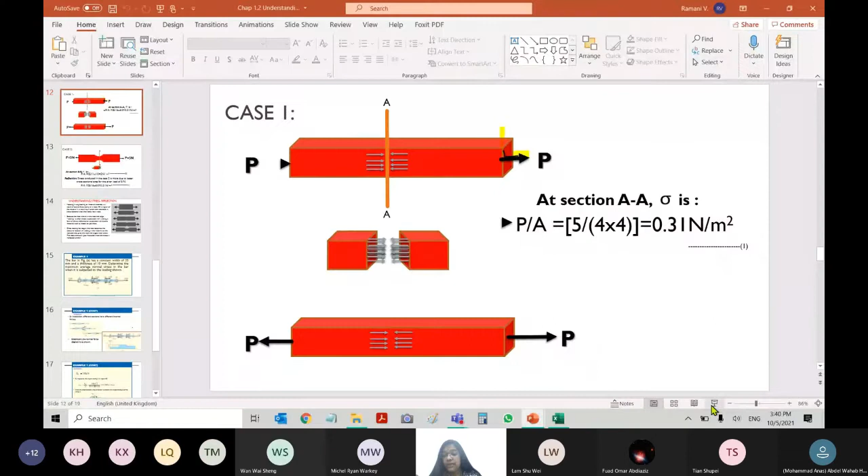You have to have good imagination power, otherwise you cannot solve. Now see, original area was 4 by 4. With 4 by 4, you got 0.31. On the other hand, is my voice low? Very low, why is this very low? Okay now it's clear. Originally the area of cross section was 4 by 4, got 0.31.

Because you have so much, I can compare here. This is the cross section, right? So much area, the applied load and the resultant stress can get distributed over a big area of cross section. On the other hand, when the cross section is changing, reduced to 1 by 1, the same stress has to be distributed within this smaller area, hence it will be very intense. That's why you are getting a value of 5 Newton over meter square.

You can also explain another way: stress is inversely proportional to area. Sigma equals P over A, A is at the denominator. Hence when the area is decreasing, stress will be more. When the area is increasing, stress will be less. The same principle is applied in many applications like hydraulic press, operating cranes, hydraulic jack - many different operations and applications are based on this principle.

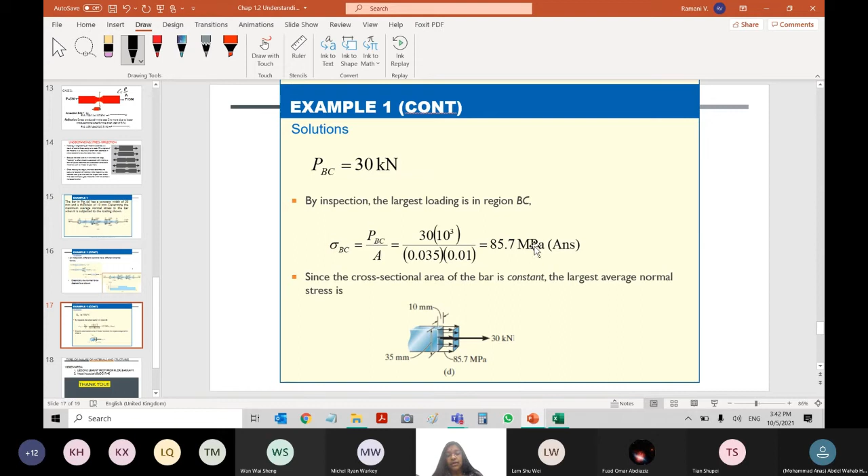Okay, and then we learned this and also solved this question. Any doubt in this question? Do you understand how we solved this one? We took it part by part, A-B, B-C, C-D. We found out the distribution of how the stress values are distributed one by one, and then we calculated which is the maximum. Hence the maximum stress will be given by this loading - stress equals load divided by area of cross section at that point, providing you the maximum stress borne by this material.

Actually, I have a question here. For the 4 kilonewton, where did we calculate it, or did we just ignore it? You see the C? Yeah, it's 4 kilonewton. So where did we calculate that, like when you did the cross section, I can't get it - where it goes.

Okay, is this clear up to this point? Wait, I take my tutorial, I explained clearly there - tutorial week 1, I think it's all in there. I did it part by part, I also posted this tutorial for you. You understood up to this point, right? How we calculated 30, got 30 in this direction - remember the point in this direction. Next point, I put all the blue color as the stress produced or generated by the material due to its property.

And the red color ones are the loads given, external loads given to you in the question. I posted this one in your tutorial section. The red color ones are showing the loads acting, and the blue are the stress produced by the body.

In the beginning you understood action, reaction. When you sum up, your reaction should be 30.

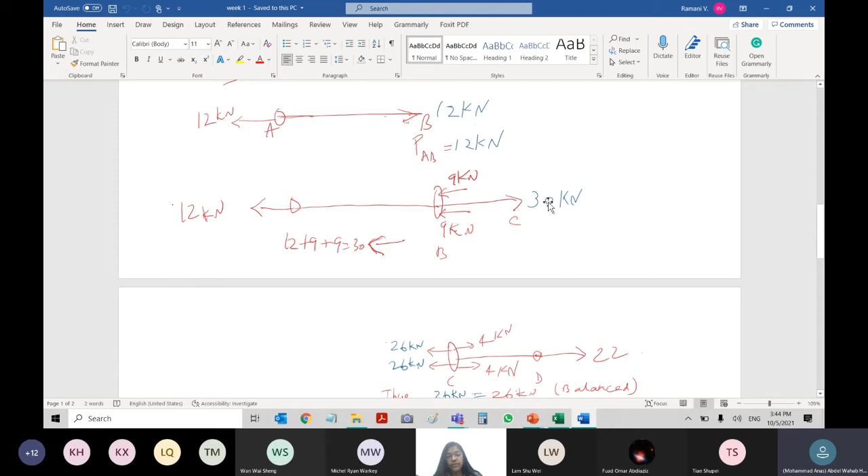When you go to BC, CD, at this point, suddenly due to the other direction 4, it must get reduced to 26, no longer 30. The point after C, or right of C, because of this direction 4, the 30 gets reduced. 30 minus 4 changes to 26, because opposite direction I deduct.

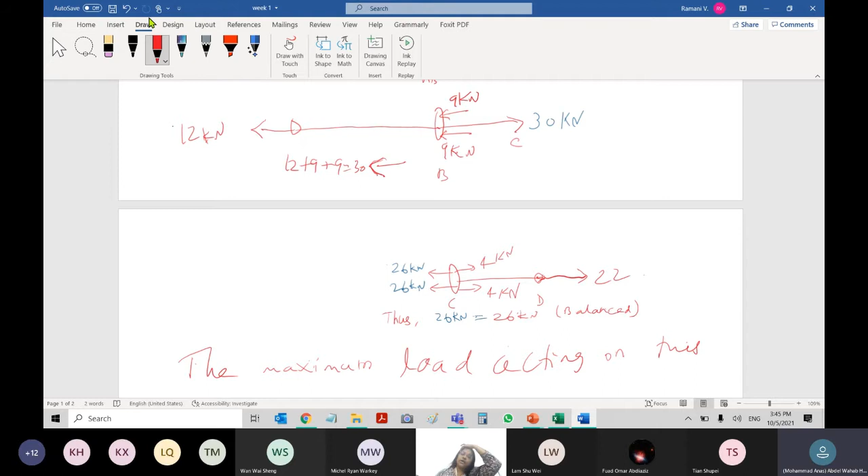It's a straight line, later I change it. But I think I posted, let me check. If not, I will post it by today. Oh, I didn't do it. I will do it together on the class for today.

Hope you are clear, and the corresponding drawing also, you please follow accordingly, follow the logic, understand. Here you must have cognitive 1, 2, 3 until 4. Your cognitive is 4 analysis, but you have to have all the cognitives from 1 to 3 or 4, then only you can solve.

You have to have knowledge or understanding, remember or able to comprehend, and then apply the equations, equilibrium equation, or whatever material property compatibility equation to solve. Finally, analyze. Analyze means, yeah, I saw the homeworks.

You please do, analyze means nobody will ask you to do plot, sketch, mark, all these things. Nobody will ask. Analyze. Whenever the question comes out, analyze, please do all the sketches. Otherwise it is like copy paste, that too, it is even worse.

You are online, I don't know how much you learn, what you learn. Please do all the drawings, all the sketches in the calculation, whatever related to it. Although you are a genius one, you don't need any solving equation, you can get the answer, you need the drawing. Otherwise you lose marks because I have to provide marks for each and every step.

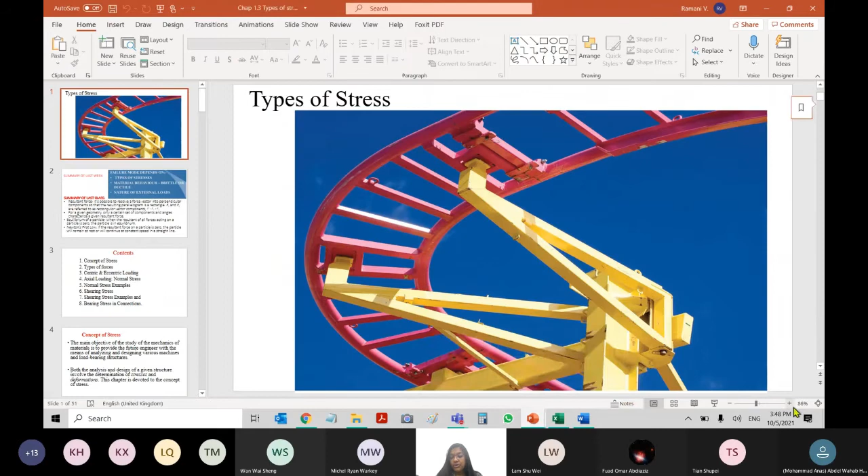Next one here, today we're going to solve for types of stresses. Last class we understood what is stress and what are the governing equations. Simple equation, I repeat: stress is denoted by sigma, equal to force over area, load over area, P over area, area of cross section.

Area of cross section, later we'll see about surface. For now, remember this point only. We move one by one, and if it is tensile force by area, then it is called tensile stress.

If it is shear, accordingly, and then what else? Compressive. Today you are going to learn all about these different types of stresses produced by different types of forces.

Come on, you see here this type of wheel in a theme park. You can see these types of wheels. You may be given this beam to analyze. This beam is supported here and then it is rotating. This end is rotating, it is anchored here, but it is rotating with so many connections. See here, there's a plate, a bracket, and there may be some nuts and bolts to join with this, and it is in rotation.

How? By properly designing its screws, and then the size of the bracket, the beam, the size of the beam, size of the angle, the support condition—all these things matter. Above all, the material.

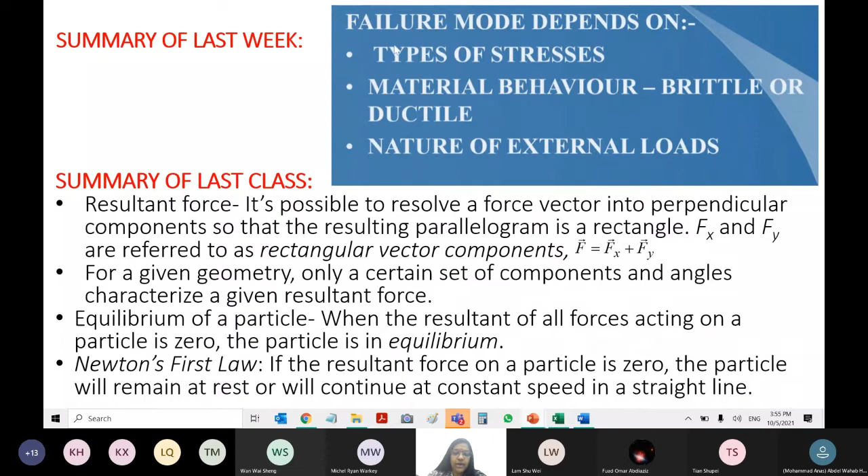This we all discussed last class. Newton's first law says the resultant force on a particle is zero, the particle will remain at rest or continue at constant speed in a straight line. There shouldn't be any difference in energy, force, mass, or stress in a member. Even if there is a difference, it should be balanced by the next loading or next component or member. Overall, the system is kept at equilibrium condition.

Concept of stress. Today's class we'll go through the types of stress, concept of stress once again, and then type of stress. It's very interesting - if you understand this, it's such an easy paper, easier than the mathematics paper for your information. But you have to imagine and understand. Spend some time every day, half an hour, at least 1 hour in a week is enough.

Concept of stress, type of forces, centric and eccentric. Here in this module I do only centric, eccentric. I teach you the theory, but eccentric is not needed. Let's understand only centric loading. Eccentric loading, you can do at a higher level, not at this point.

Let's start off peripherally. You have to go horizontally. Must know all types of stresses, all types of analysis, and then we can go deeper.

Axial load, normal stress. Axial load has different types, I will explain one by one. Today we will go through normal stress. Hopefully I finish normal stress, two types. The next class we do the shearing stress. If I can finish shear stress, I will go for this.

So there are two types: normal stress and shear stress. Shearing stress examples: bearing stress. The stress produced at the bearing, exclusively at the bearings, is to be analyzed separately as a typical structure. That's why it is also called bearing stress. We'll see how it is being analyzed.

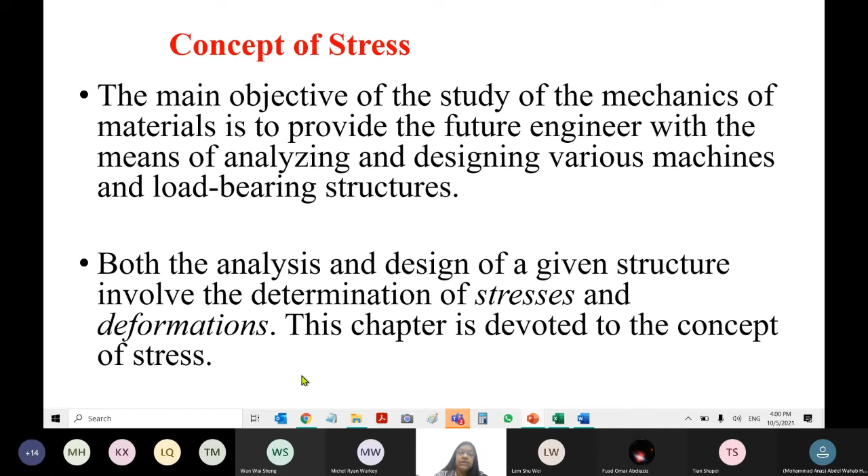This chapter is devoted to the concept of stress. Now we'll look into the concept of stress. To understand the concept, you should know the types.

Start with the type of load. We call this the type of loads or forces acting on the structure. This makes a difference in the member, causing a different stress distribution in the member. That's why you should know what are the types of loads coming in.

If I miss anything, please guide me. Maybe you've come across a new type of loading in your previous studies, other subjects, a magazine, or a newspaper. I wanted to discuss this matter, but there's a new type I forgot. Suddenly I'm not getting it. Let me finish this first.

I will get it - forces induced by gravity. Number one is gravity, meaning self-weight of the body. Without gravity acting on it, the body would be weightless, floating or flying off. Any body has some weight because it is acted upon by gravity, and because of gravity it has some force.

It may be dead load or live load, though actually live load should be separate. I don't know why it's grouped like this, but live loads are also acted upon by gravity, that's why they're put under this category. So we have dead loads and live loads - permanent and transient, self weight and moving weight.

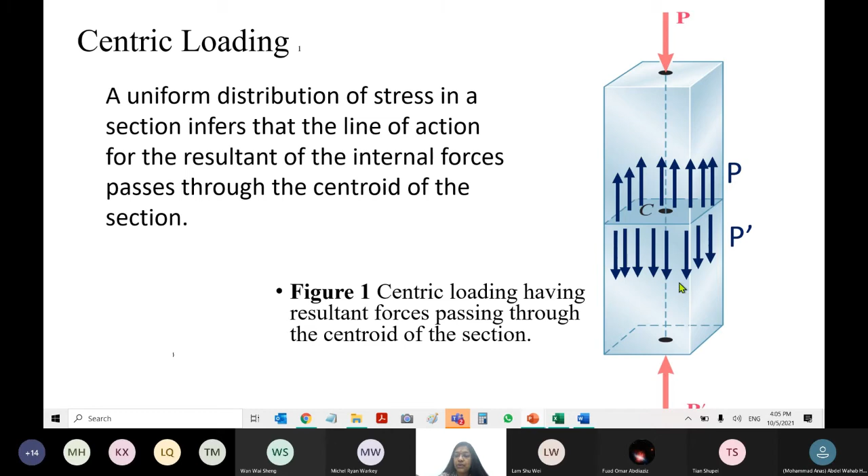There's some text. Okay, leave it, you can see the P dash. It has P dash.

When P is acting, there will be a reaction due to the material of the body, the body respond to this load by amount of P, and this load is in this direction, P dash. That's why the body respond. Any section, like you can take section here or here, it will be subjected to a uniform load in opposite direction, equal and opposite. This P dash is distributed all through the cross section, and the summation or the resultant of all these things will be equal to P dash. That's the beauty, you have to understand that way.

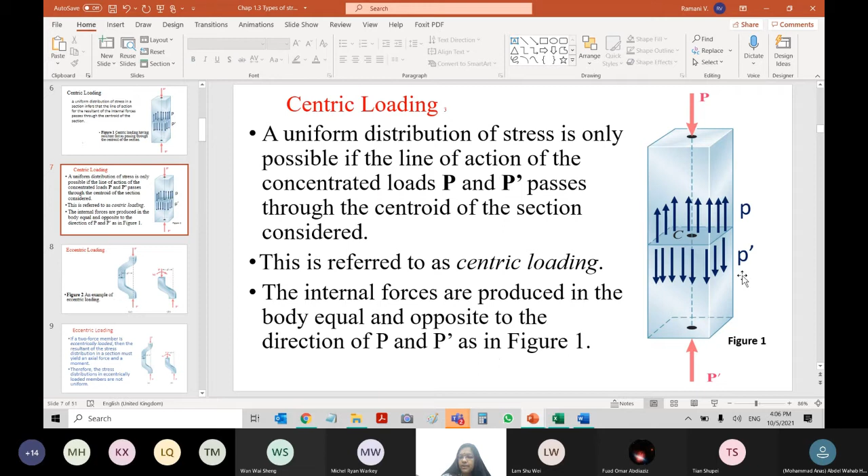The point load is applied at the center or axis of the member. Along this axis of the member, it is reacted or responded by the material or body in the opposite direction, and is uniformly distributed across the area. That is what you have to understand. This is referring to centric loading, because the load is at the center. The internal forces produced in the body are equal and opposite to the direction of P and P dash. So it should be opposite, according to Newton's law of motion.

Then, eccentric. What is eccentric loading? An example of eccentric loading: you see here, the load is here, the center of the material is here. The material continues from here until it passes through and ends here. There's a bend only. The material passes like this, and the center of the body, or centroid of this whole body calculated, is lying at this point, but the load is acted at a distance d from the centroid.

Then it is called eccentric loading. Same goes here. And if a two force member is eccentrically loaded, then the resultant of the stress distribution in a section must yield an axial force and a moment. So whenever there is an axial load, whenever a member is subjected to loading, it may be axial load or sideway or vertical in any direction, it must show two things: reaction to this force, and also a moment.

So far you are learning like this, but technically we cannot prove it. So far we understand that the load applied to a member is distributed in two directions: one in this direction, another one across. When it talks about the direction in the vertical direction, it is a force, shear force. When it is in the horizontal direction, it is of a different type. It may be a summation of bending, tensile and compression. That's why I end up with a moment. We call the horizontal reaction or response of the body as a moment.

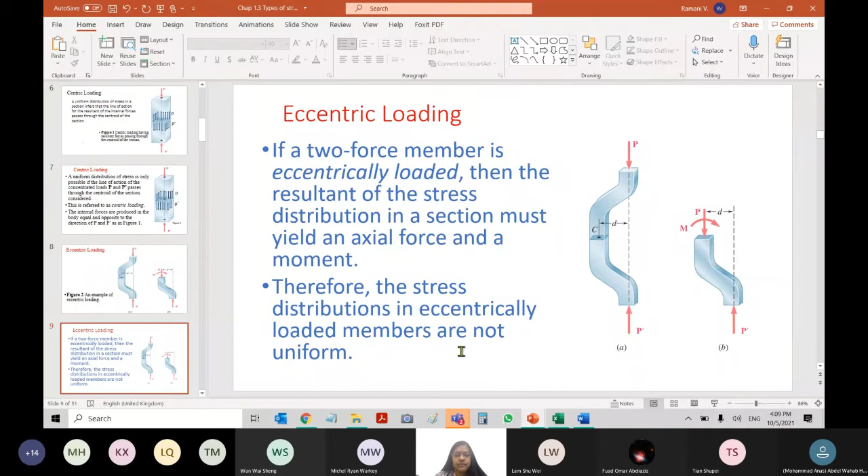The overall response of the member in the horizontal direction is denoted by moment, and the moment will vary based on the support condition. That is why, whenever you studied for a simply supported or pin joint, there is no moment. It tends to move, it doesn't react because it can freely move, no moment like that. If it is fixed, there is a moment. So the body will respond in two ways: one is shear force, another is moment. Shear force along the surface, bending moment across. We will study one by one with the cross section and the diagram.

Now we are doing only stress, let me finish stress. When you go to a particular topic on tension and compression, I will explain one by one.

Stress can be classified into three things: longitudinal stress, tangential shear stress, and hydraulic stress. Don't take it as a chart, try to understand first.

Actually, I should not show this table. This chart you have to do yourself when I explain this. That's how you have to learn, right? You know what stress is now, right? Now you're going to learn what the types are.

I already told you the stress has to be defined based on the direction of load, quantity of load, or in other words, what is the response due to the load. Whether the member is going to deflect, displace, deform, break, bend, collapse, bulge, or buckle, all these things matter. Or just shear, one over another, like this. What type of deformation is it? That is what you're going to learn. Accordingly, you can define the types of stresses. I repeat, the type of stresses is mainly due to direction of load and type of deformation.

Clear? Come on, I do the explanation, then you can classify yourself. Only three types are here, though maybe we have mainly 4-5 types. I just do 3 types now. We'll do one by one.

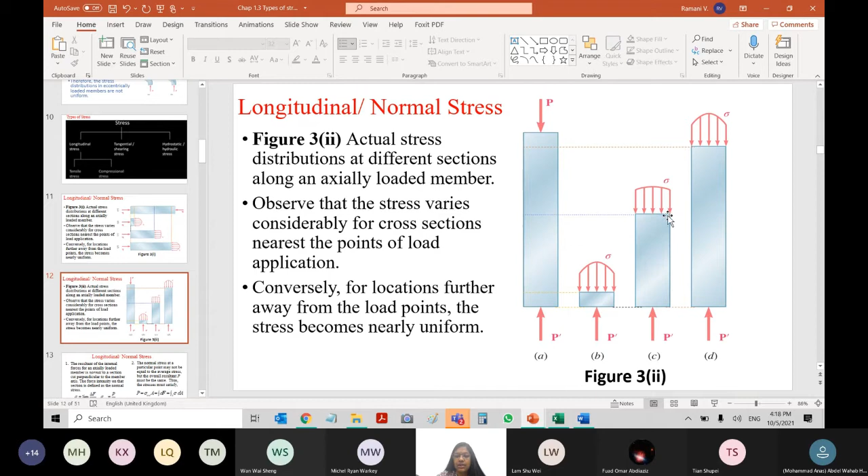Observe that the stress varies considerably for cross sections nearest the point of load application. Conversely, at locations far away from the load points, the stress becomes nearly uniform. Is this clear? Near the point, gradually it is distributing, and it is well distributed further away.

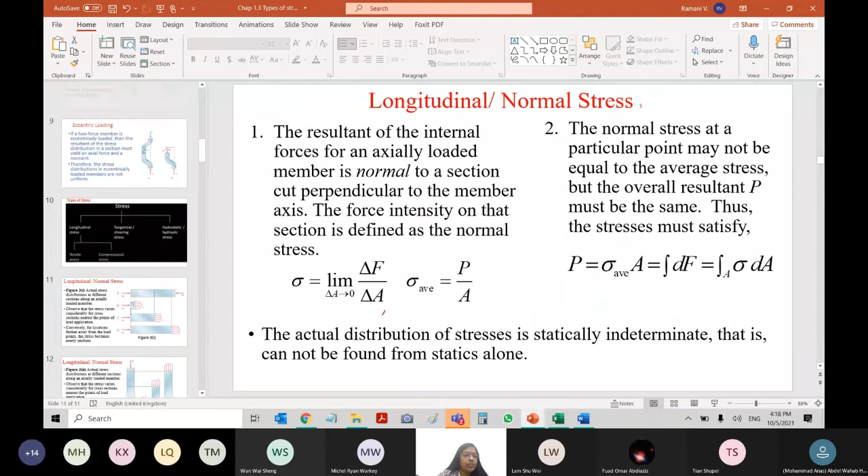Next one, longitudinal normal stress. Go back to this one. So longitudinal or axially loaded members, the stress can be called longitudinal stress due to normal load, or normal stress, or axial load towards or along the axis of the member.

Remember this point, these you can understand later on. Tensile and compression we will understand later, for now just live with this. We are going to solve some calculations, then we go for this.

It's simple: if the axial load has the effect of compressing, the diameter cross section increases, then it is compression. On the other hand, if the load is applied away from the body, like the first case we discussed, it will get thinner, there's a necking effect, elongation takes place, then it is called tensile stress.

We'll study one by one later, but now just understand axial load and the response. Based on the loading type, it may be tensile or compression. Tensile results in elongation of the member, length increases. Compression, the cross-sectional area changes, increases.

Right, I will show you this with an example.

Shear stress. Next is the shear stress, which the student explained very nicely last time. Shear stress is just shear. It is applied in many applications. If you want an example, think of scissors. Cutting with scissors is due to shear stress produced by the body applying shear force. You can cut anything with scissors.

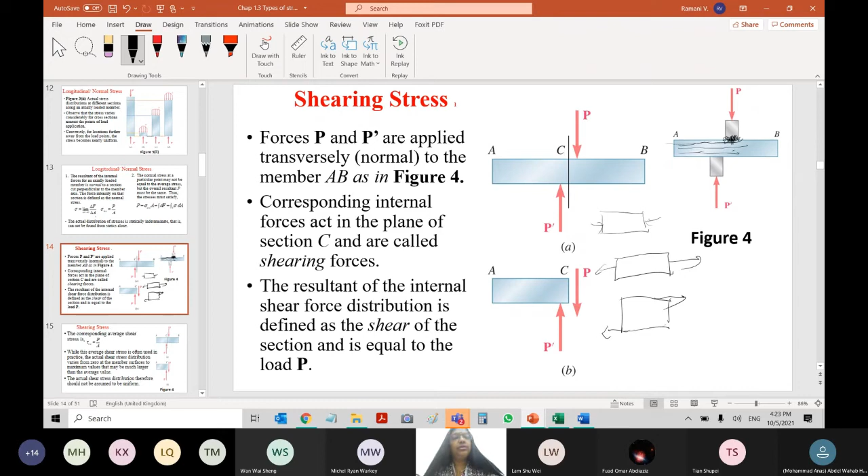If this member is like this, the layer will move due to shear. Very bad drawing, let me change it.

So the ends of the member will respond due to this loading applied to it. It will be moving in this direction. If the member is moving in this direction, or the layers are moving accordingly, the new position of the member will be something like this. No, I put the direction wrongly.

The load is in effect to move the member and then get deflected to a new position, which is shown in red color like this, due to shear load. The shear load will act like this.

I can say this as a shear force, and shear stress is tau. Shear force you can take as S for now. So the shear force is in effect to displace the member at an angle—that's why they produce an angle.

See, the failure is at an angle. Later you will find out how much is the angle, how much is the resultant force and the deformation, and so on. For now, understand that compression increases the cross section, tension thins or reduces the cross section, but shear force is in response to sliding the layers of the member one over another. In other words, the member is tilted or slid from its original position to a new position. So, you may have to classify and understand the type of stresses acting on the member.

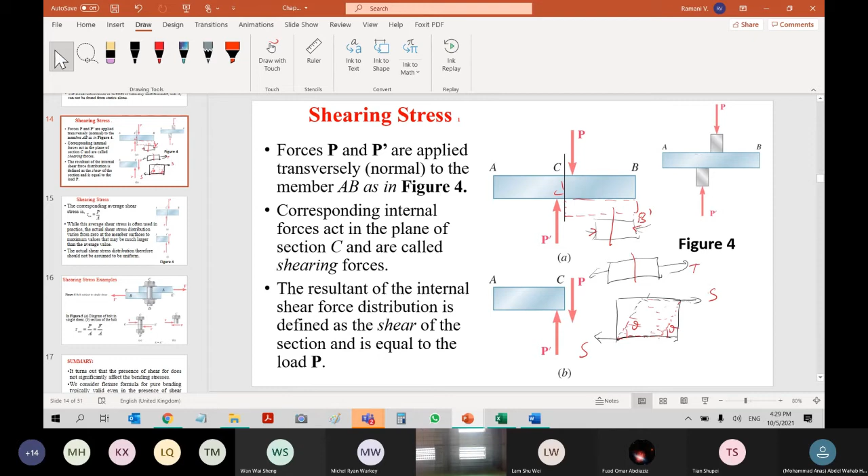That is most important. Going back to this one, the stress distribution is very interesting to see here. On the surfaces it will be 0 because nothing responds there, but in between there are materials which can respond to the shear stress. That's why there is an angle.

The distribution diagram itself: starting from 0, then maximum, then back to 0, like this. The distribution of stress will start from 0 on the layers, and then be maximum at this point, tau max, like this.

Later you will study about this distribution. For now, understand that on the layers, on the surfaces, the shear stress will be 0.

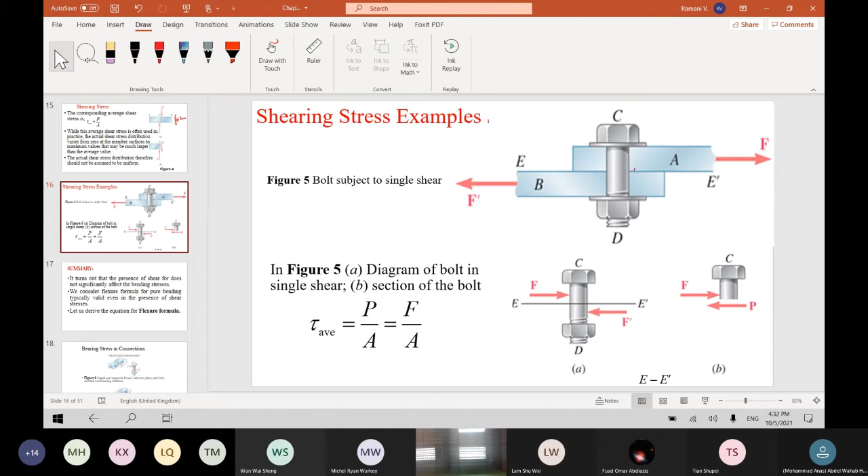Finally, I wanted to bring some models to explain. Let me give the theory first, then I show some models, easier for you to understand.

Summary: it turns out that the presence of shear does not significantly affect the bending stress. We consider the flexure formula for pure bending typically valid even in the presence of shear stress. This is covered in chapter 4, but for now I just explain.

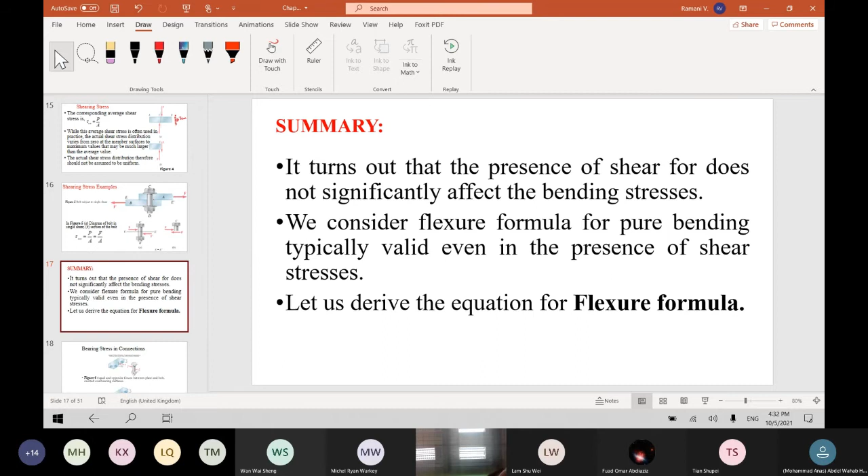Wait, I'll open a new one. There's a new slide. I don't get into it. One moment. Insert. Okay, how do we... Oh, my slide is like this. Okay.

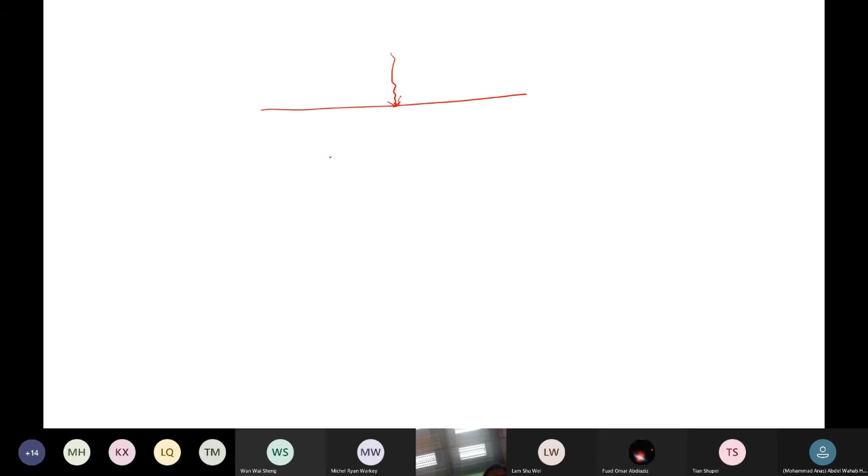See, when a member is loaded, all of you know that it will be getting deflected like this. Accordingly, are you seeing this screen? Can you see the screen? Yes, okay. Imagine this is subjected to a load P.

Automatically, if you imagine the member to be like this, cross section - this is a line sketch, this is a cross section of the member AB. When there is a loading, if you cut this section at this point XX, the cut section I show you here, cut section at this XX will be like this.

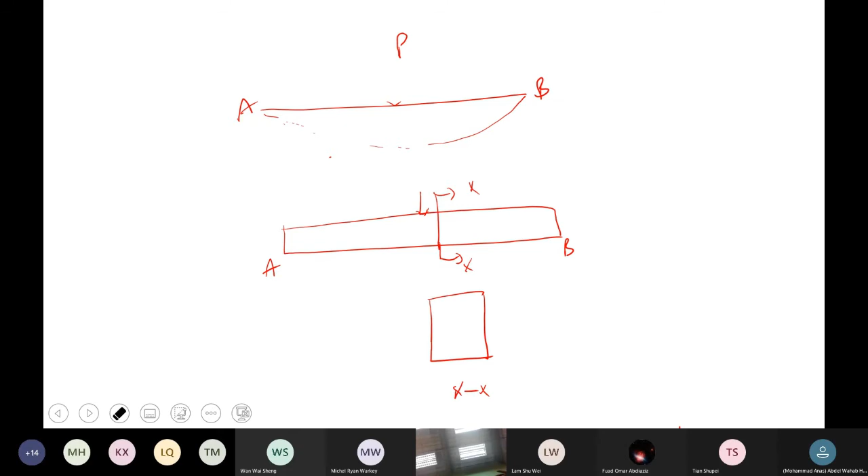Whenever a member is... let me use my draw tool, eraser - very bad line, okay. Like this, why is it's exact line - sorry, assume it to be a straight line, not to scale. Straight line, very bad, right?

When you take the cross section, the shear force will be acting in this direction. The shear force will be acting in this direction - that's why you're plotting how much is the value.

Across the cross section - I'm talking about the cross section, cut section at XX and view from here. View from here - if I put an arrow you may understand a different way. Imagine that you are viewing from here. This is the shear force. All these things are shear force.

But on the other hand, there are two types of deformation one can visualize, one can analyze through STAAD.Pro or Revit. Number one is shear force. Number two will be the same cross section - I'll do this in another color, blue. The other one is parallel.

Across, due to the loading, this is happening - shear force is happening. When you look at the horizontal direction, this is all the member response, it will be like this, arrow pointing like this. In the perpendicular direction, going very high at the middle.

And increase - I will explain what these are later on. Imagine this to be the perpendicular, perpendicular to the direction of the force. This is across - in this direction you are seeing, this one is in this direction, like this, okay?

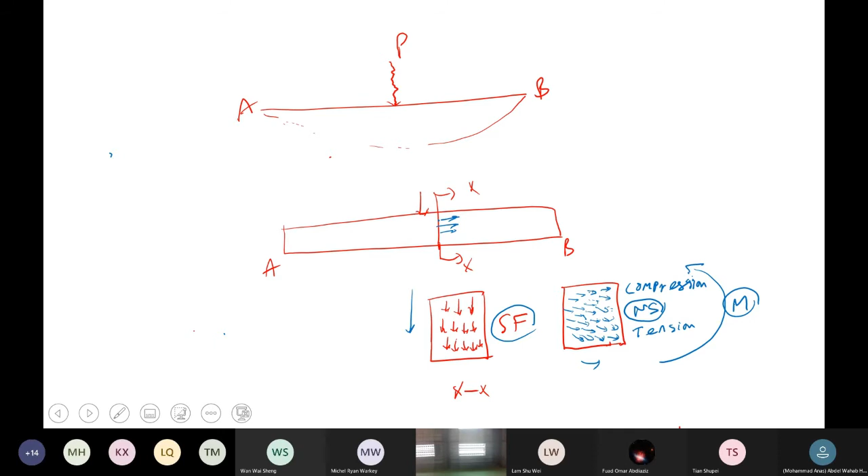Having said this, I turn to the normal mode. Can you see the slide? Any question in understanding what is shear force and what is bending moment?

I repeat once again. A member subjected to loading will be deformed in two ways. One is shear force, which is parallel to the cross section, another is normal to the cross section. The one normal to the cross section may be in the form of compression or tension, and this effect can be calculated by means of bending moment. We have to calculate the bending moment, and with that you can answer the problem of analysis and design. But for compression and tension, we have to calculate how much stress is produced. We cannot stop with the force alone, we have to calculate the corresponding stresses.

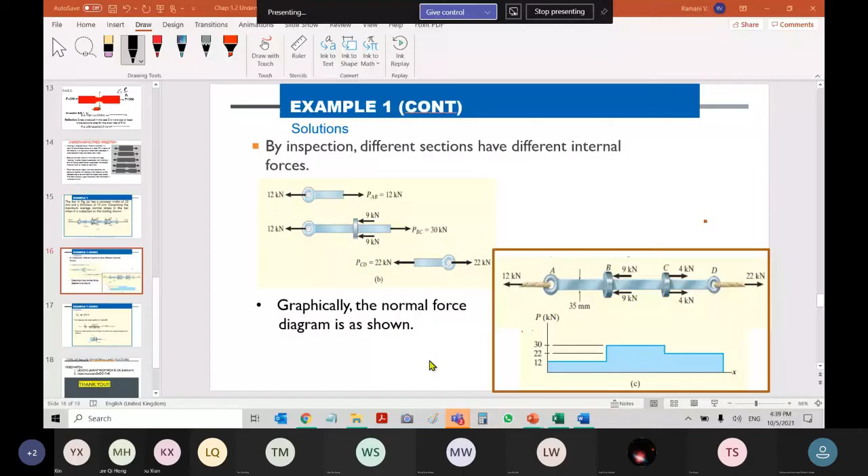So if you calculate at the top, where is this? I'll share again. I think you can see now, on this one.

This shear force effect is very minimal, but still it is important in cases like the rivet and bolt. But in the case of beams and columns, we don't bother about this, we don't design for it. We only design for the bending effect, because this is going to bend, break, or fracture the member. That's why we call this flexural. Later you will study about the flexural formula or bending formula to find the bending stress, the corresponding stress produced in the body.

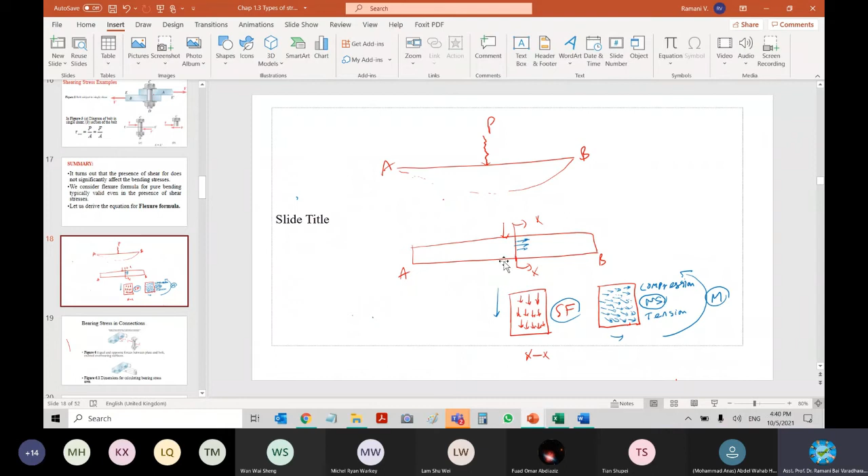Now moving on, bearing stress. Just now I told you about the bearings and the bolt connected to the two planks or panels, which are connected by a bolt. Similar situation here. This is statics, not needed.

Okay, I just finished with this for the type of stress. Bearing stress is the stress produced at the bearings, an equal and opposite force between plate and bolt exerted over the bearing surface. It is still called shearing stress, but because it happens at the bearing, it can be called bearing stress. By applying the same formula, shear force over area, you can calculate the shear load, and the corresponding stress will be called shear stress or bearing stress, because it's due to the bearing. That's it, not much different. We will do calculation, then you understand how to analyze.

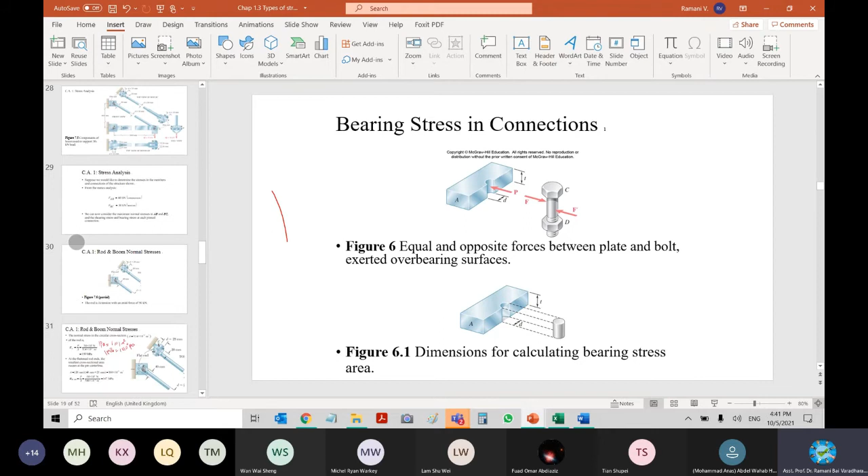Where else, these are all the statics things. We will come back to the calculation later on. We finish the theory until this part. Where is the theory? Here, right, this is important.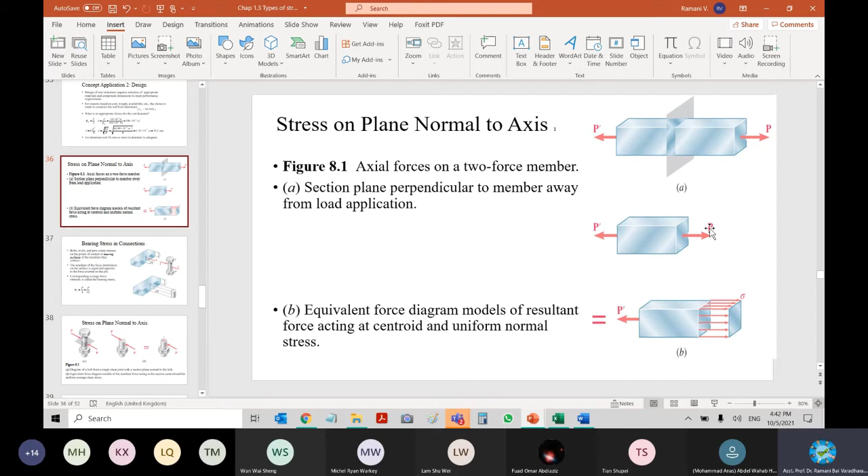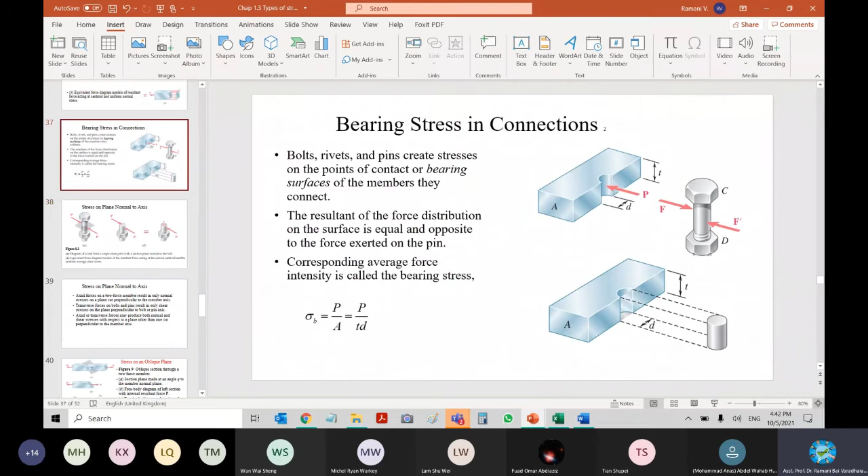Okay, again coming to this one, stress on plane normal to the axis. Try to understand all these things, one and the same, but given for different situations of loading. Almost the same, we already discussed this one, also done.

When we do calculation, I will explain about this part. Just hold on, I cannot do the deformation here, the changes I cannot show. Stress on plane normal to the axis, we start from here. It's a summary: axial force on two-force members results in only normal stress on a plane perpendicular to the member axis, that's what I say. It's always perpendicular, the force is acting perpendicular to the cross section. And transverse force on bolts and pins results in only shear stress on the plane perpendicular to the bolt or pins, transverse to the longitudinal section.

This part, again I cannot explain well here, I'm sorry, I have to do by calculation. Last one, axial or transverse forces may produce both.

This is important. Normal and shear stresses with respect to a plane other than one perpendicular to the member axis, right? Both forces are in effect to produce, we go back to the classification.

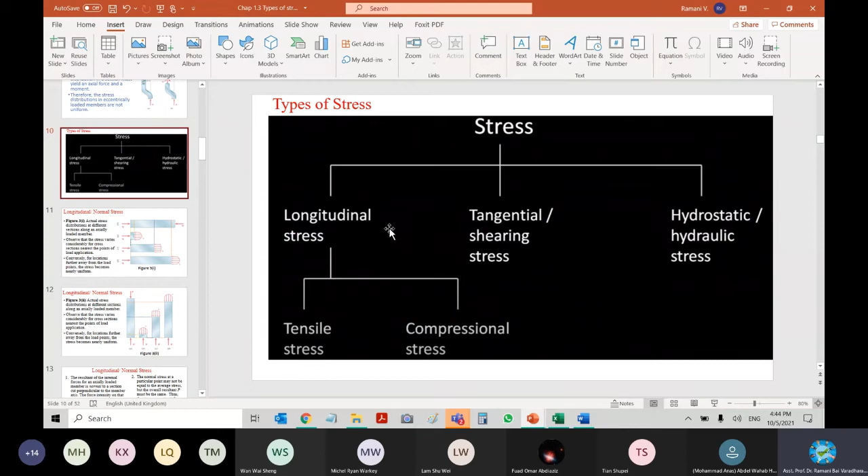You have longitudinal and tangential, right? Longitudinal or normal stress is perpendicular to the cross section. This is parallel to the cross section or along the member. This force is acting along the member, parallel to the member.

In both, you will have perpendicular and depending on the load condition, you will have the corresponding stresses. But I do calculation, then only you will able to differentiate. Just reading theory, you cannot. Axial and transverse forces may produce both normal and shear stresses with respect to plane, right?

In overall, it is saying about all members are subjected to. If you load a member, yes, it is subjected to both type of loading, axial deformation and also shear deformation. But in some cases, shear is ignorable, negligible. So we design only for axial load and its response in terms of normal force.

In other case, like bearing bolt or two members joined together, right? Or one body or another body, right? You are joining two members. Mostly in joining two members or member in rotation or member in movement, all these things you will design for shear first. Shear will be more significant than axial. So you will design for shear.

Having designed for shear, it does not mean that it is not having axial stress. It is also having axial stress, but is borne by the value you design for shear, which is the maximum value. That is what the meaning of that sentence.

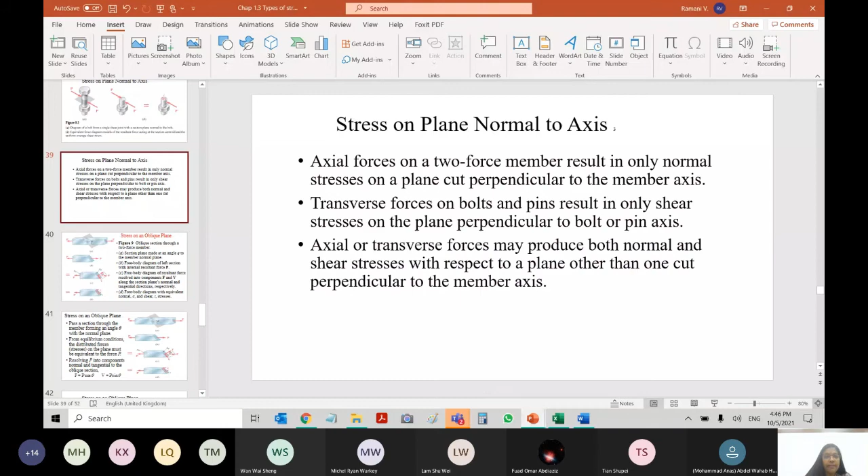Oblique, again oblique I am not going to discuss in this module. Just for understanding, for your knowledge only, there are also loads acting on oblique plane. You may have to consider what is the type of loading on the oblique plane. It depends on again a design.

It follows the design, corresponding diagrams and resolving forces according to, because its oblique is inclined, right? You need to resolve forces to the respective direction to get your answers done. This is not much, it's just one for reading only, I don't cover for syllabus.

Right, state of stress, and this is most important. Remember this point, just now I told you, any body, even if it is not loaded, static also, water tank, take water tank, without water or with water also, it is having some concentrated loading, right? It is static in condition. The tank will be subjected to load, or a box, right?

Maybe a box, it may be a flooring, right? A block, it may be a block, or any type of structure will be subjected to stresses due to its own self weight, or due to gravity, or due to live load, if it is some objects are moving or placed onto it. In all conditions you can see all these differences.

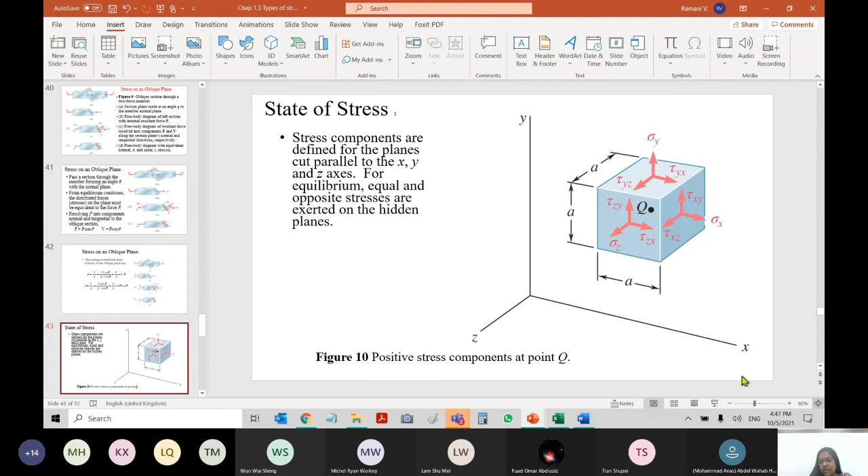Take this face, take this face. There is a normal stress in x direction perpendicular to this face, isn't it? Can you see it clearly? Please try to understand this, most important.

Two types of forces existing on the member. One is normal stress, which is perpendicular to the surface. Another one is shear stress along the plane. Because this is analyzed in 2D, x and y, right? You have this plane, right? When you calculate the stress in this plane, it is called tau xy.

When you calculate the stress in this plane, xz, then the stress which is lying on the plane, tangent to the plane, is called shear stress in this plane xz. Okay. On the other side, if you want to calculate the same, similar to this one, in this face also, you can see a normal stress acting perpendicular to the cross section or the surface of the member.

And other two are lying on the member. The shear stress are lying on the member, or it is parallel to the layers of the member, right? Sections of the member, tangential to the member. Same goes here.

You see here, normal stress is in this direction, in this plane. It is perpendicular to the surface. Shear stress are tangential or parallel to the surface. Shear stress always tangential or parallel to the surface. Okay.

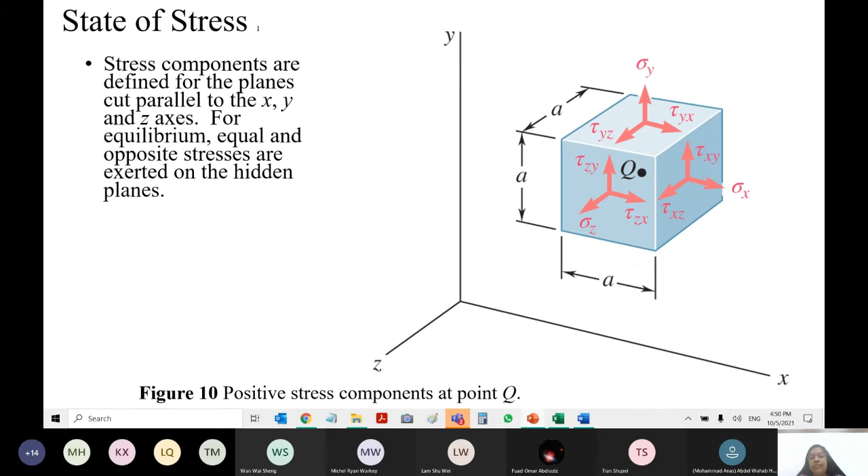According to the type of structure, component of the structure, either you will design for both. Mechanical engineer, you should design for both, because the machines, parts of machines are both equally important. Add to this thermal effect due to thermal. But in our case, we do only normal stress. Shear stress comes when it is a shear wall or a retaining wall, wherever there are two members, two bodies, two media, then they will work for shear design. Any questions so far? Not yet.

Delta, resultant associated with each stress component acting on a small element. For solving, because it's an area, right? All of you know integration, differentiation, right? Where you apply differentiation, where you apply integration. When you analyze an elemental area, the answer at the end, you want to know the whole area, you will integrate. Integrate means what? Add small components. You take a small elemental area and then add the small elemental areas. Integrate means add. Integrate over the limit of this area 0 to a, you will get dA. If you take a small area dA in the beginning, then integrate over the area 0 to a, you will get the value for the whole area. These are the mathematics you studied before, but I'm not going to do any derivation, just to recall and remind you what is happening here.

Where is my pen? Okay, pen is not here. Something happened. Right, where we are? I did finish the last one.

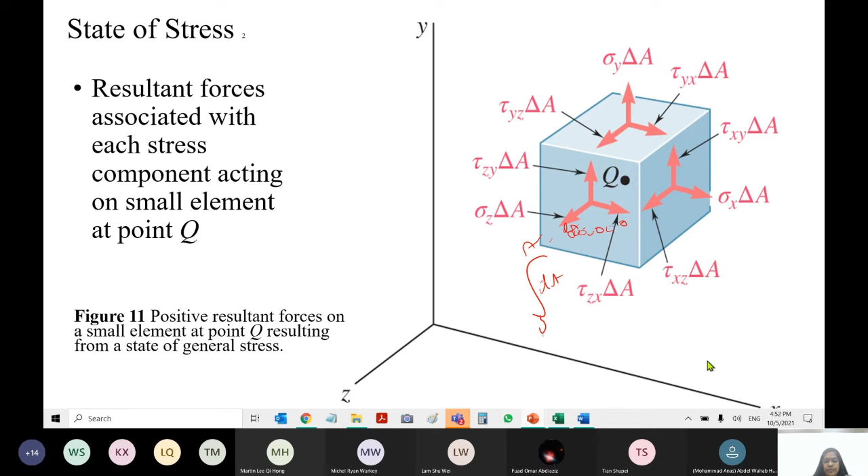So integrate, integrate means you having found this elemental area, small area, to get the answer for the whole area, you add, simply add. In olden days, in UK also, they started doing graphical analysis just by adding small squares before integration came into play. Once the integration came into use, they started doing integration conveniently to get the effect for the whole area. Now also you can do it for small sections. You just plot it in a graph. Then knowing the scale, you can add and find the effect for the whole area.

Both are same. State of stress is important. In state of stress, recall your equilibrium equations. For 3D analysis, all 6 equations should be 0. All the forces in all 3 directions should be equal to 0. All the moments in 3 directions should be equal to 0. Hope you understand this equation. What does it mean? Body subjected to loading should be nullified by its stress produced. If it cannot bear the load, it will fail, isn't it? Then no equilibrium. And these things are dealt with by determinate structure and indeterminate structure. I don't know whether you studied this or not. Just for now, I explain the meaning only.

Determinate structures are determinate, we can determine. That is the meaning. How you can determine? Based on the number of equations. So you have this type of 3-dimensional analysis, I already explained I think. 3-dimensional analysis means you should have all these 6 equations. You may use all 6 equations. If the unknowns are 6 and match with the 6 equations available, it is called determinate structure. I can solve, Jason can solve, Anas can solve, who else? Wan Wai Sheng can solve.

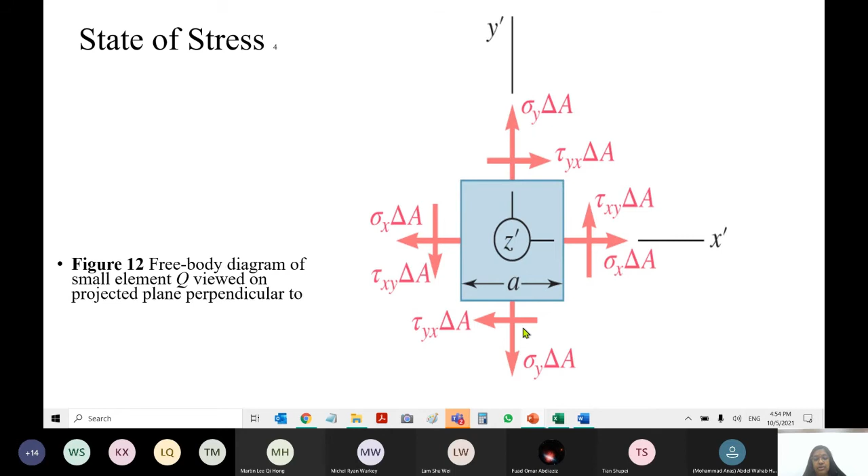Free body diagram of the small element Q, viewed on a projected plane perpendicular to it. You can also view it on a perpendicular plane. Don't worry about this plane now, we may get confused — we'll cover this plane in chapter 6. If you look at this on a plane surface, it will show normal, shear, normal, shear, normal, shear, normal, shear.

Okay, come on, this is important — I may ask questions on this in your test 1. Understand the factor of safety. What do you mean by factor of safety? It's the safety factor, right? What is the maximum load that I can apply to a body? What is the maximum stress that I can apply to a body?

Knowing this factor tells you how much you can load for a designed bus or a designed ship. A ship traveling from North America to South America through the Panama Canal — you design a new ship traveling at very high speed so that in one day you can transport goods between North America and South America, with a powerful engine. It is successful because of engineers like you and your pioneers. Now it is successful — within one day you can transport. It was such a cleverly ingenious design, holding all the loading inside while traveling at high speed and reaching in the given time of one day.

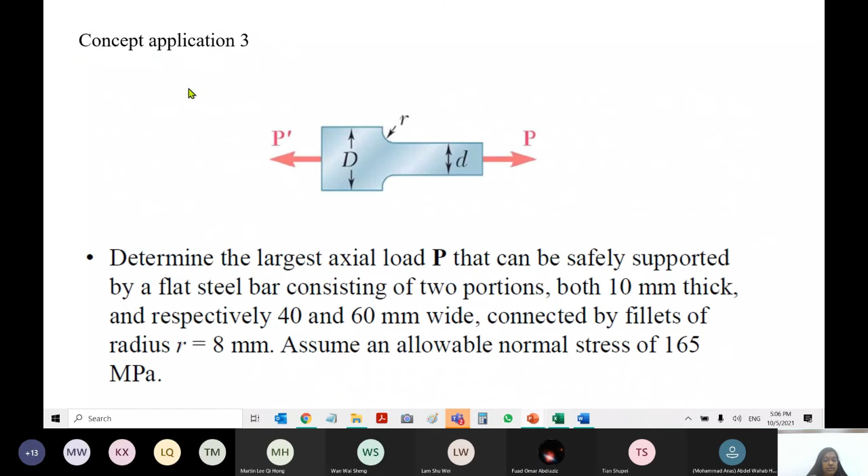Factor of safety. Factor of safety considerations. Where is phone already? Yeah, okay, answer. You have time? Okay, I have to start with the calculation, right?

Factor of safety considerations: uncertainty in material property, uncertainty of loading, uncertainty of analyses, number of loading cycles, types of failures, maintenance requirements and deterioration effects, importance of member to integrity of whole structure, risk to life and property, and influence on machine functions. We will detail this with an example in the next class.

For now, just read these out. There are some factors which affect this. With that, you can handle the values. For example, if you know the uncertainty of loading, you can handle that number. You should know the variation, what type of loading. If you can get the profile of the loading for a particular design, you are able to set this factor of safety conveniently. I will explain in detail in the next class. I stop here. Any questions, you can ask me.

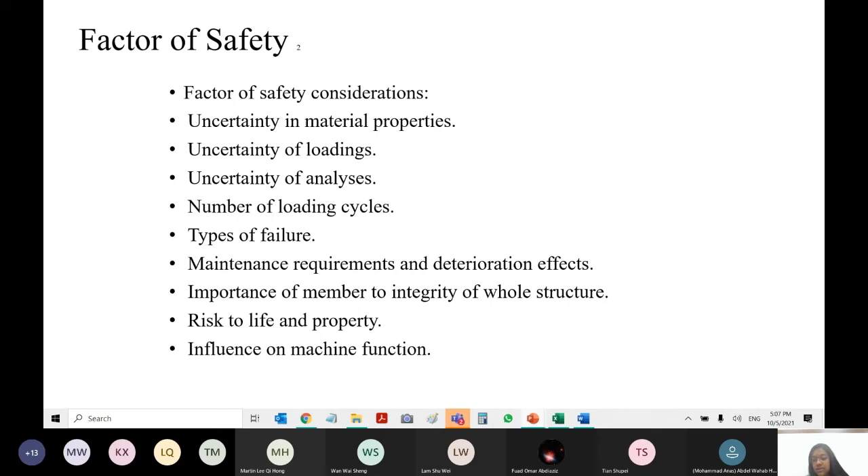Let me move on to the calculation. I'll start with homework one, then do one calculation on this stress analysis. Share the class tutorial sheet. Any questions, you can ask me.

Where are we? Homework, right? You want me to solve one homework? Let me take the homework paper. All of you take the homework paper. Try to solve it, switch on your camera please. Week 1, and then tutorial sheet. Okay, you want me to solve 1 or 2? Can you see this? Let me share this question. Where is it? You want me to solve 1 or 2? I have given 3 questions.

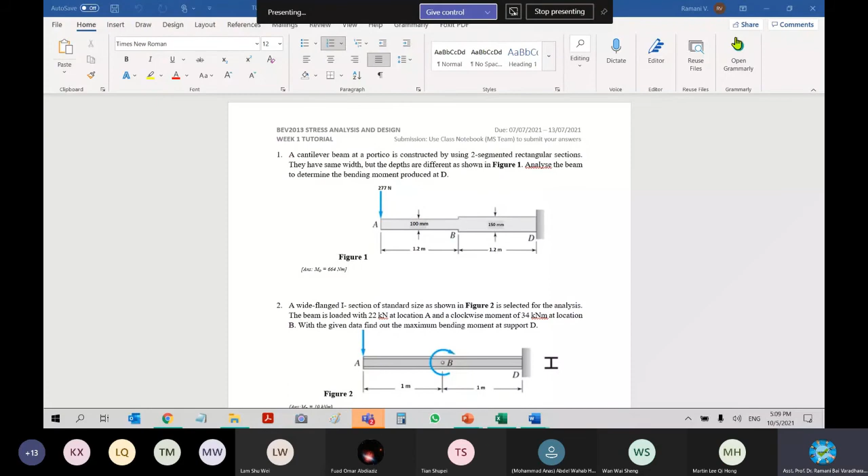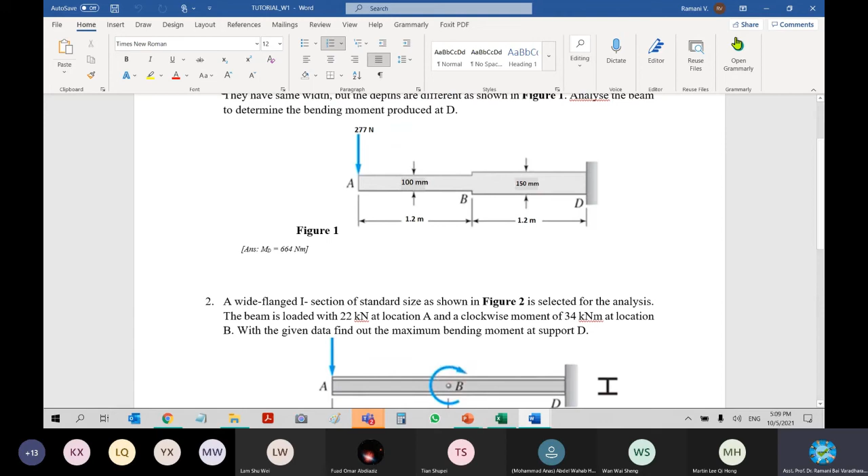The third question is much easier, you can conveniently solve this, right? All the sides are given, just find the angle, you can find the respective values. Hope you can manage, if not you can ask me. Don't worry, you can always disturb me during working hours. But get it done before the deadline, don't come at the last minute. Never mind, I spent a lot of time in the beginning, but you have to get along with that. Now answer me, which question did I say, 1 or 2? Two. Okay, very simple question you are giving me.

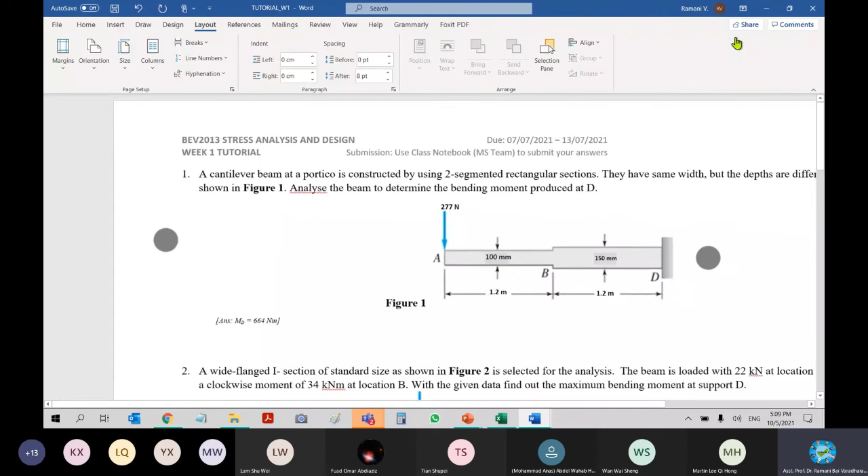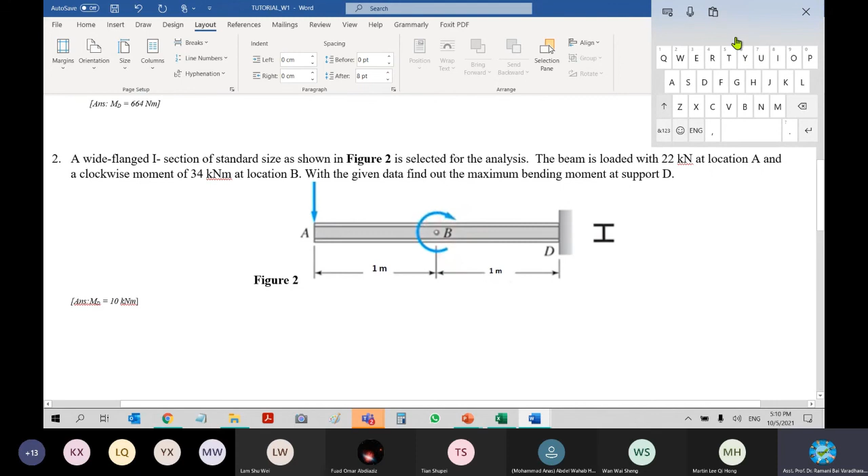Okay, now start with this, I will do it here itself. I understood that you remember those basics, those basics of solving questions. With that, I am going to answer this question. Let's start. All of you can see the screen, right? Can or not? Can, huh? Right, can you see the screen? Yes, can. Okay, now start with the given data.

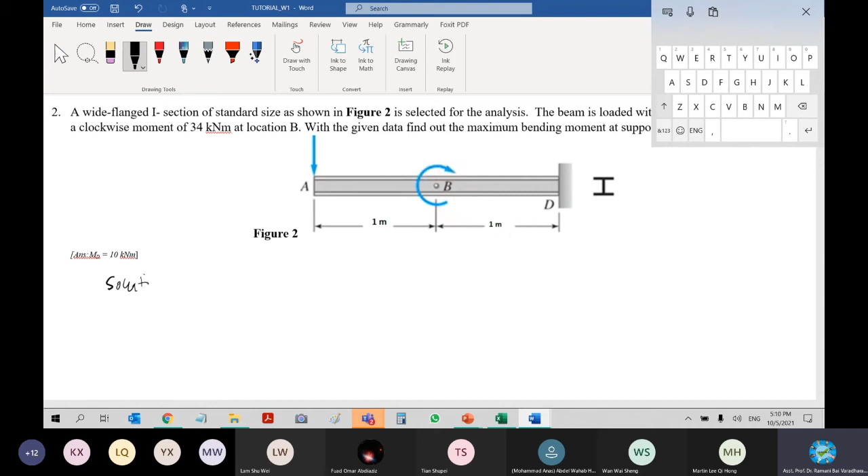The solution starts with given data. Solution, I write solution, I put it on already. One moment, that's why we have to meet in person, it's so dangerous. It's going like this. Okay, hope I can manage with this. All right.

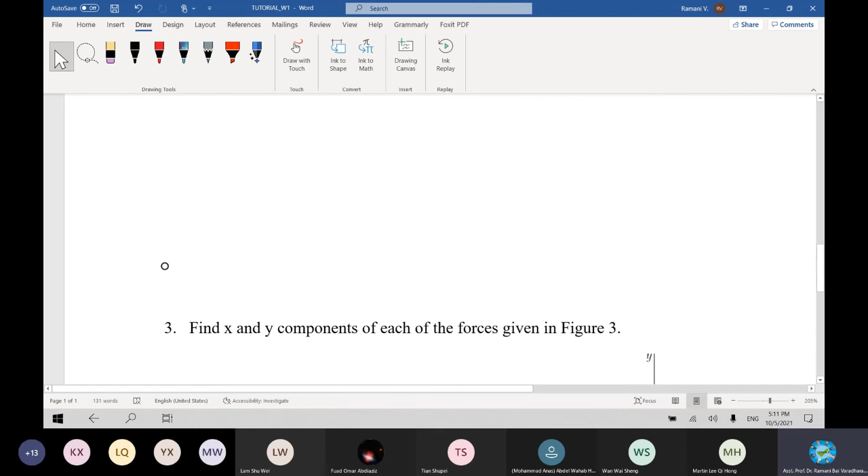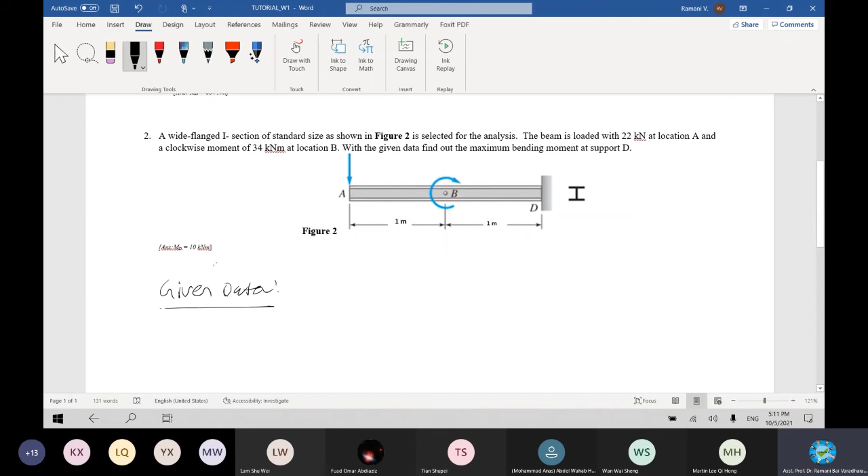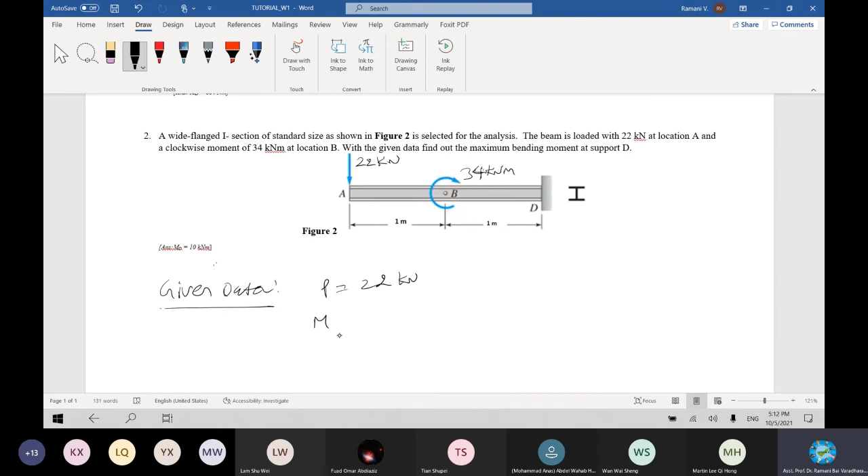Write down the given data first, easy for you to calculate. A wide flange I-section is given, right? You're asked to calculate the beam loaded with 22 kilonewtons. At this point is 22 kilonewtons at location A. Remember, very simple question. At A, and a clockwise moment of this one, how much is it? Clockwise, 34 kilonewton meter at B. With given data, find the maximum bending moment. So given with the loading, P is equal to 22 at this one. Moment at A, B, just B. Moment at B is 34 kilonewton meter. And then what else are you given?

Cross section thing, you are not going to find the stress anyway. And the clockwise moment is also written. Finally, you need to find the required answer, you're asked to calculate the maximum bending moment at D. Maximum bending moment at D. Very simple question, let's start with the solution.

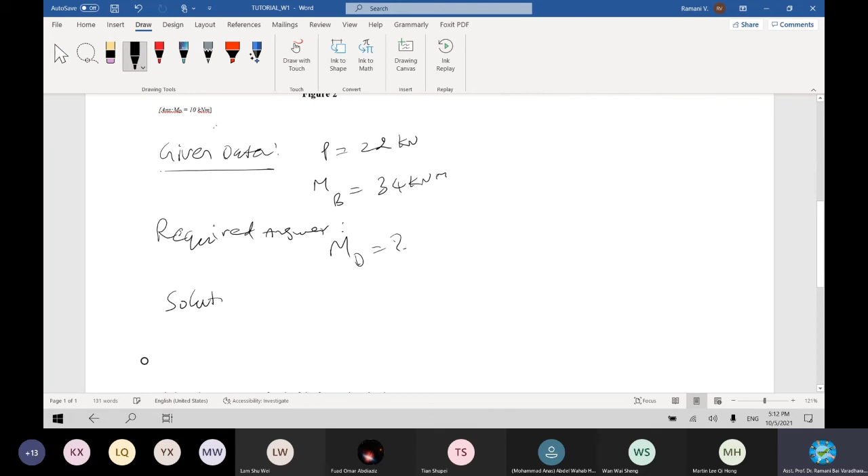Starts with the free body diagram. Draw the free body diagram to understand what is given to you, right? Better you draw it nicely at the side so that you can plot the other answers conveniently. You are given a member. I draw in black. What happened? Right. What's happening? Okay.

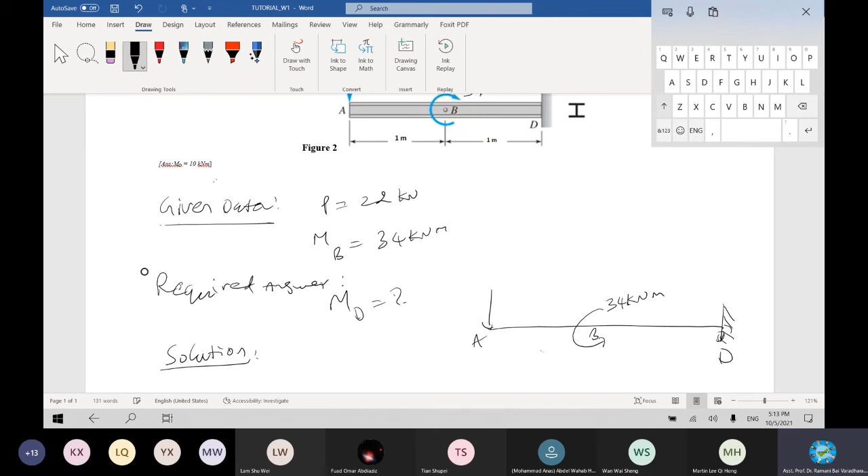A member A, B, and D, and this is fixed support. Remember D, and then you are given a moment clockwise, which is how much? 34 kilonewton meter, and then loading at this point is 22 kilonewton, right?

First of all, you should know the sign convention, and then your free body diagram is having all the force and reactions, right? Let me plot the reactions first. This is free end, right? Just loading is applied. There's nothing, right?

Because of this loading, there will be a reaction. I do it in red color. There will be a reaction at this point, right? Which is called RD, right?

Technically speaking, mechanically, whenever the member is loaded at this point, automatically there is an equal and opposite reaction at the end, which is RD, so that the member is balanced, right? That is one thing. In addition to that, it is fixed support, so you have a reaction produced at this point. And then because it's fixed support, there will be a moment caused, right?

There will be a moment. Whenever there is a fixed support, you would have studied, right? Due to this support, there will be a vertical, there will be a horizontal, there will be a moment, right? Either clockwise or anti-clockwise is produced, but based on the solution, after solving equation, you will know whether it is in this direction or anti-clockwise direction.

So this is the basics of materials. Accordingly, I repeat, because of this loading, there is a reaction RD caused at this point, which is also equal to 22. Later, we'll find out.

Now, there is a moment, right? We do not know what is it. Because of fixed moment, there will be a moment. For now, I take it to be because it is rotating like this, right? It is trying to rotate like this, which is you should know now what is clockwise, anti-clockwise.

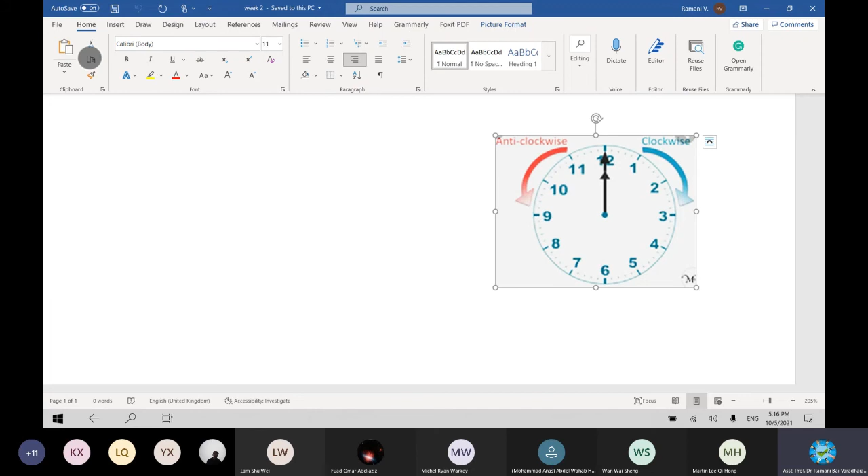Remember this point. I copy this figure to take you to week 2, right? This is class homework. I paste here.

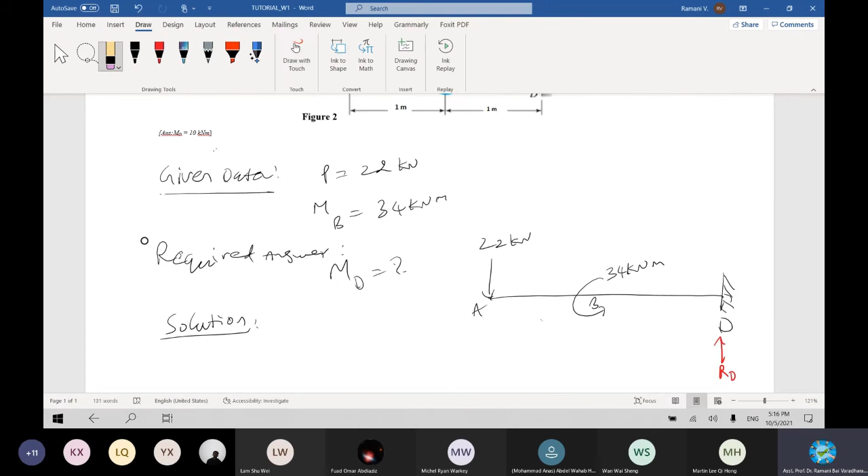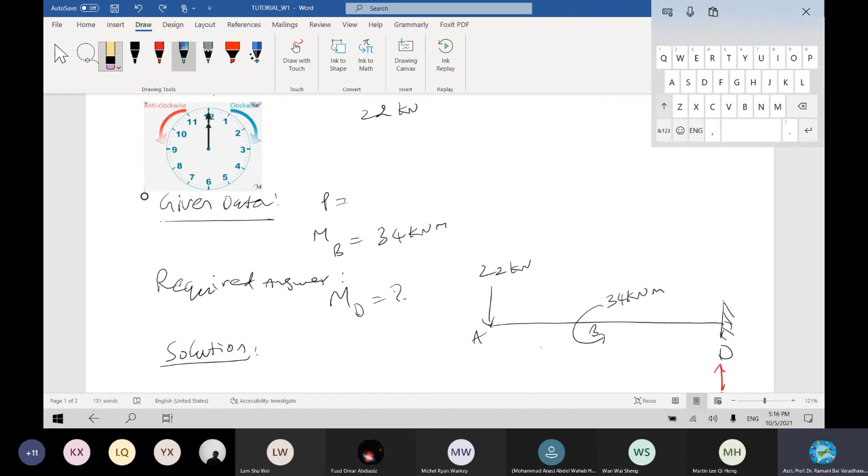Oh, this cannot move. It doesn't matter. Imagine I put the clock here, this clock, at this point. Where is it? Red color. I put blue color as my clock. I put the clock here.

Always to know the anti-clockwise or clockwise direction, you keep the clock at the axis about which you are going to find the moment. Then you are very clear to know which is clockwise and which is anti-clockwise. Now if you mark the clock here, 3, 12, 6 and 9, right? Now this is clockwise, see? This is anti-clockwise, right?

What is the question given to you? Oh, I put it wrongly, you didn't tell me. The question is, what is the moment? Which is clockwise, isn't it? Which is clockwise, you didn't tell me.

The moment is clockwise. The given value at B is moment clockwise. See here, it is following the clockwise, right? 3, 6, 12, clockwise, right?

Now coming to our analysis. Because of this loading, the reaction created, because of fixed support, there should be a bending moment. Bending moment for now I assume to be acting like this, right? The member will respond in this direction. So I keep the moment in this way, okay, which is again clockwise, right? Later we will, by solving, we will know whether it's clockwise or anti-clockwise.

That's why we need to solve the equation. Some people may answer without solving, but this way of doing will tell you whether your assumption is correct or not. According to the loads given, moments given, support condition given, we say because of this loading there is a reaction, and because of fixed support there should be a moment. The moment is in clockwise direction because it is in action of anti-clockwise, the body will respond, so the reactive moment will be in opposite direction, which is clockwise.

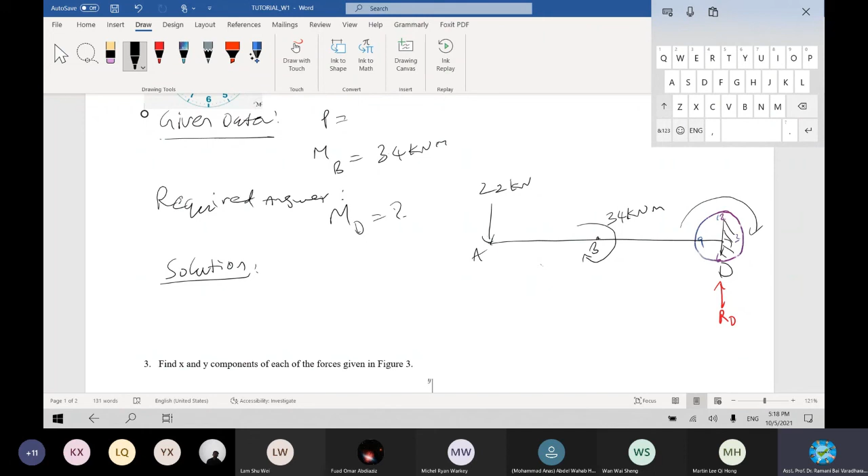You clear with the analysis and the free body diagram? Now our free body diagram is showing all your moments and reactions. Now solve this. How do you solve? Anybody? One way? Yes, solve nicely. Come on, answer me. How do you solve this?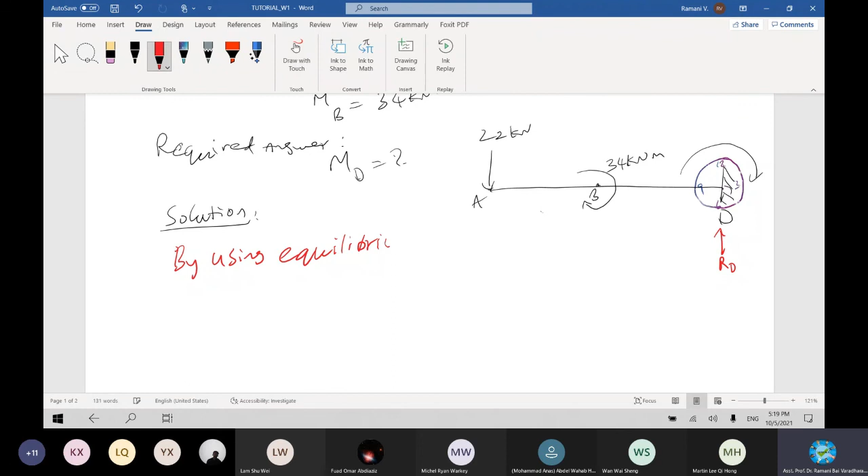By using? Always you write by using equilibrium equation. Equilibrium equation. Start like this. Equilibrium equation. Mind your spelling. I don't know. Equation. What is it? All forces in y direction equal to 0, x direction equal to 0, and so on, right?

Now we solve in one direction only. All forces in x, y direction equal to 0. Let me take this point. Okay, start from the beginning.

What is the force acting downward? How much is it? Okay, you take downward. I write the sign convention. When you write the given data, please do the sign convention also. Downward negative, upward positive, clockwise positive. Our clockwise is like this, right? And clockwise, anti-clockwise. Anti-clockwise is negative. Please remember these points.

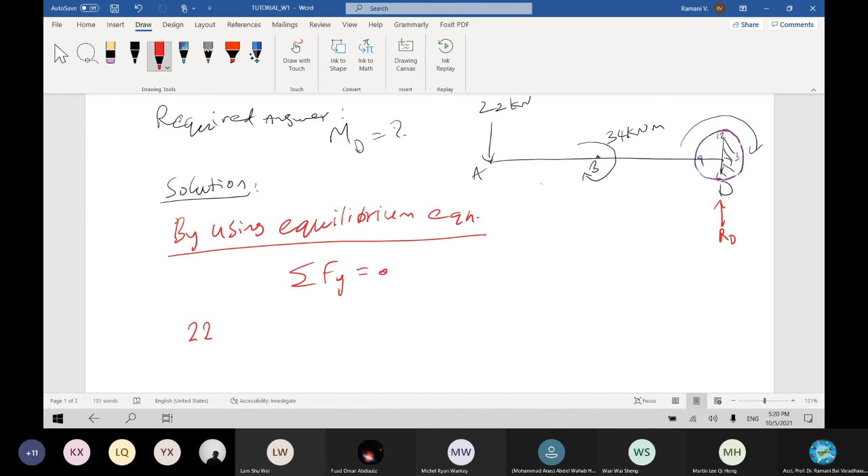Then you can solve easily. Come on, start from here. What is the load? 22. Positive or negative, Jackson? Follow the sign convention. Positive or negative? Negative. Very good. Followed by, go on.

Any load acting? Any load acting? No, only moment is there. Any load acting? And there is one thing here, which is RD. What is this value? I mean the direction, positive or negative? Negative. Positive. Any other load? Away. Okay, now RD is equal to

22, upward. Fine. Our assumption is correct. So equal to 22, you can conveniently write down. Balanced. Finish one part. Now shear force is determined already.

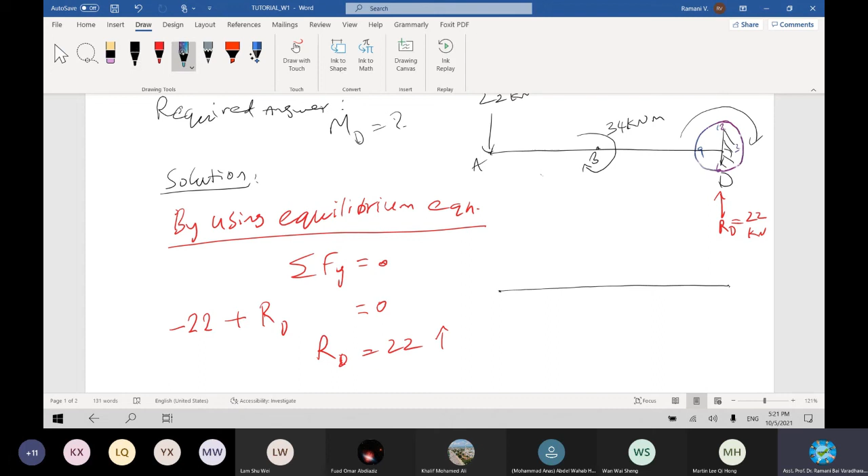We can plot it. If you want to immediately plot it, you take this plot the axis. This is graphical plot. I take the axis as in black, and then the shear force diagram in blue. My blue is not clear blue. And this blue, I put the shear force diagram in blue. Now start from here. Plot the shear force diagram.

Although a bit variation is there, just keep it like this. Any load, no other load is acting here. In the previous case, there are two loads, right? When you cross with the other load, you need to deduct or subtract according to the direction. In this case, no load is acting until this point.

Until this point, I still have, how much is it? Minus 22, 22 kilonewton. And when I come, I still have minus 22. But there is one positive 22. So add positive, it will reach 0. Add positive to 0. This is the axis of the shear force diagram.

Okay, this is the axis, right? This is the axis. I don't extend it because we don't have member. No point I extend it. For the member, when I start, this is 0, negative.

I reach here minus 22, but there is another positive acting. Plus minus 22 plus 22 will be 0. I have to reach 0. That's how the shear force diagram is finished. Okay, shear force diagram is drawn for this.

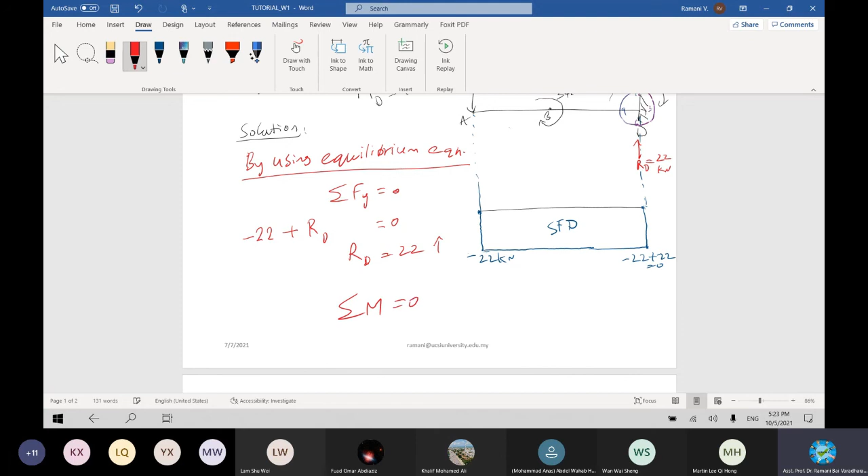What? For finding moment, you need to know. Finding moment, you need to know sigma m. Sigma m is equal to 0. Use this equation. Okay. Sigma m is equal to 0.

About this D, because I have to, about an axis only you have to find sigma MD towards at point MD, at this point, sigma MD or point at MD this point. About this axis we are finding fixed end. So solve. Wait.

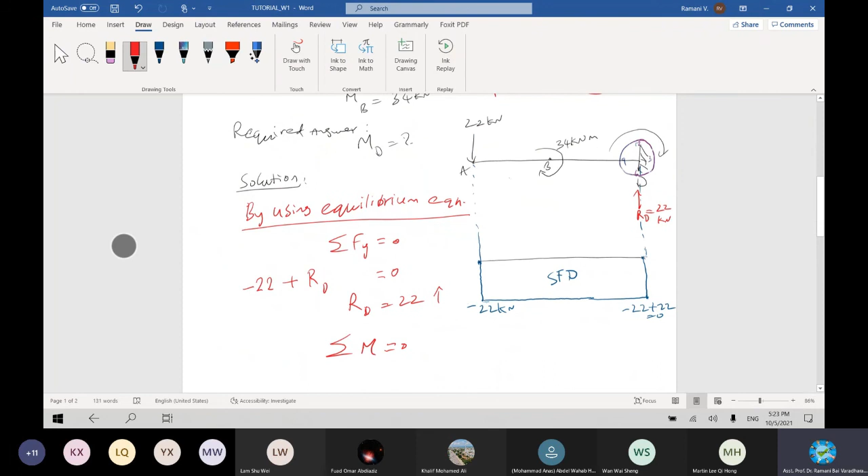Cannot be like this. I have to account for this value also. So sigma m, let it be sigma overall, moment is equal to 0. Start from the beginning for now. Okay, where you start from here, from this point onwards. Where's the beam? Easy for me. Anyway, this one, you see the member, I explain now, and then I go to solve the problem.

From here, we are taking moment about this axis. Okay, we are taking moment about this axis. This is moment MD. We already calculated, right?

So for MD, if you want to calculate, you start from here. This force into the whole distance can be multiplied because it is acting throughout the member, and the cross section is not varying. That is one equation: 22 times 2.

Another way you can also do part by part: 22 by 1 and then 22 by 1, same result. Now coming to this, there is another moment acting. You need to add this moment which is clockwise positive, this is anti-clockwise negative. Sum all these things must be equal to 0, or equal to opposite direction, or equal to MD. With that the value will be found out.

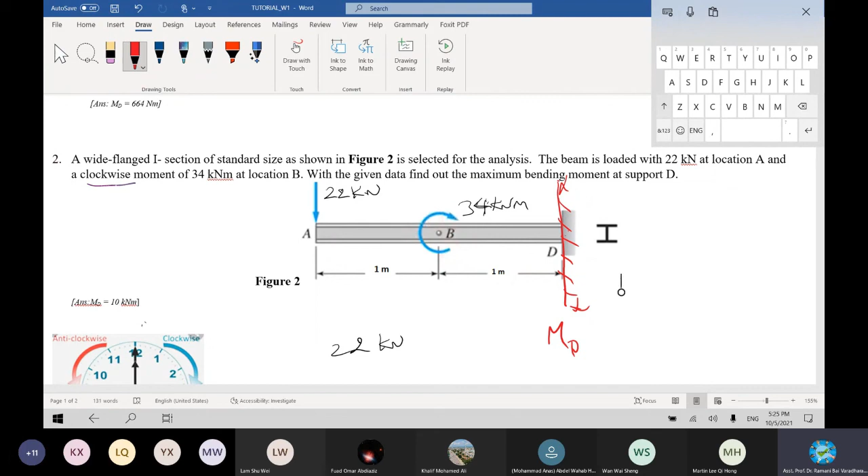Okay, now I know the value. We need to find out the maximum bending moment at D, that is the required answer. I know all the reactions.

Now sigma MD is equal to, start from here. Where is the member? Start from here. 22, positive or negative? Moment is force into distance, right? 22 into, I directly put the value. How much is the distance? 2, because we are calculating about that axis. Moment should be taken about an axis. 2 meters, better you use the units. 22 kilonewton times 2 meter.

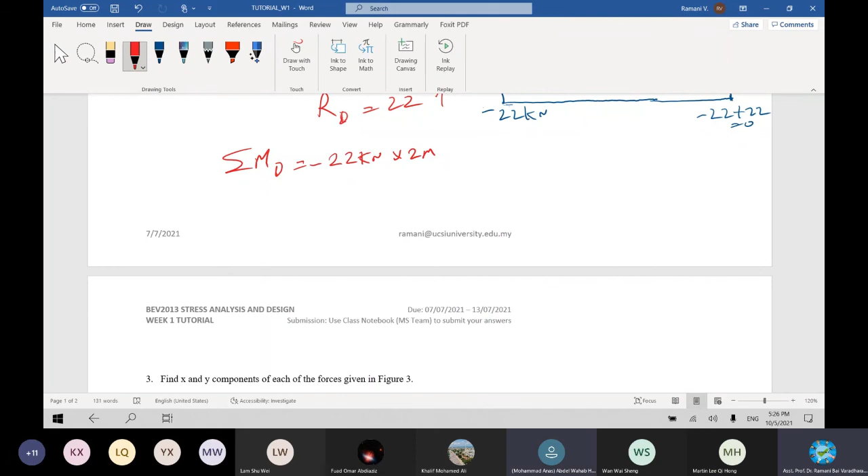Can you answer me, positive or negative? Anybody, work along with me. Positive or negative? Negative, anti-clockwise negative. Any other moment followed after this?

After this, you please understand, you can do it part by part from here to here, or you can do it overall because it's a uniform cross section. No need to do part by part, otherwise you have to do it for this one, then this moment, then this part. First do AB at B and BD.

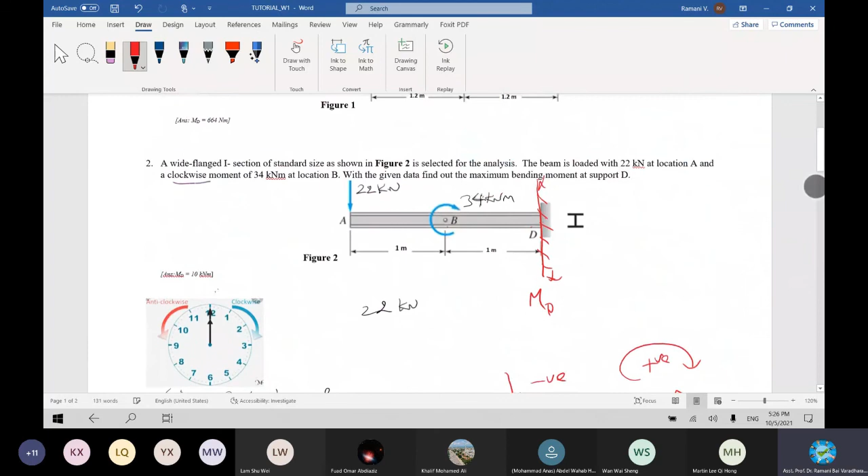Also same. Now, when you cross this point, there is another moment acting which is clockwise direction, 34. So positive, clockwise direction positive 34. Moment itself is in kilonewton meter. Moment itself is given to you, how much is it? Find out. 10 kilonewton, negative 10.

Negative or positive? Negative only, positive, this is higher, right? 42... 44, right? Okay, why negative? Then our assumption is wrong. Okay, our assumption is wrong, but leave it like that, no problem.

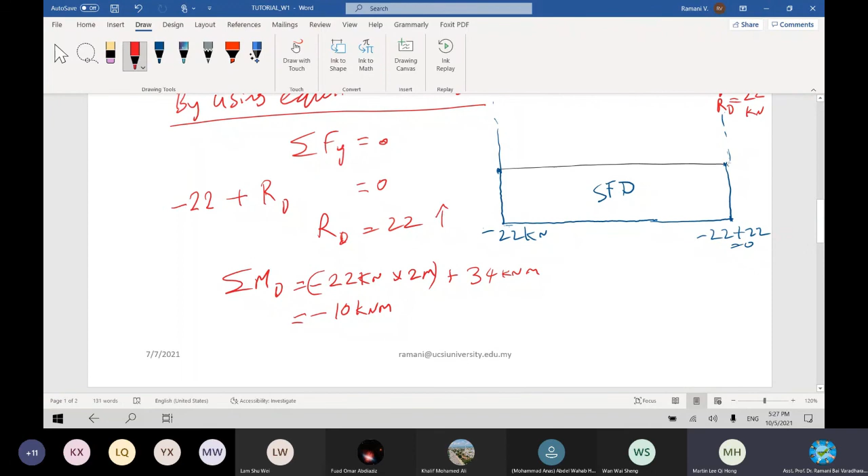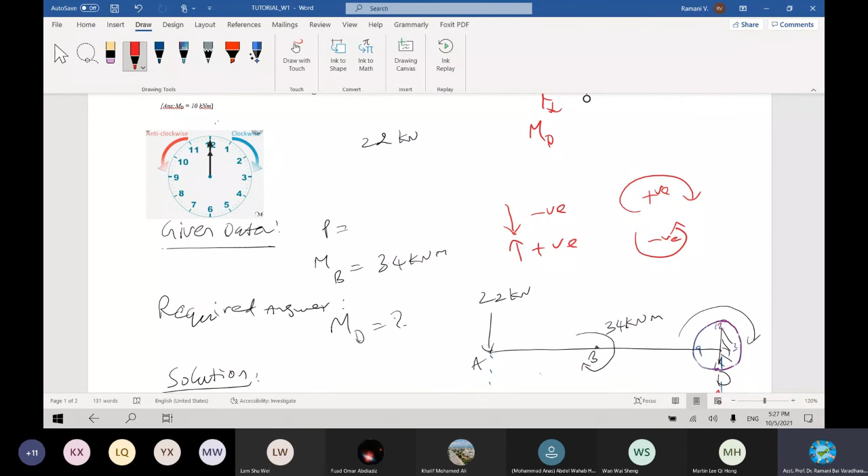I thought for a moment anti-clockwise should be negative and clockwise should be positive, but clockwise should be negative, right? Not necessarily, not necessarily. You may do either way, but end up with the correct answer, it will get resolved itself. But this is the norm we follow: clockwise is always positive. It is not separate for moment.

Any other, is it different for moment? Take it this way: if so far you have followed, I need to check why you follow like this. But in any analysis, we take clockwise positive, anti-clockwise negative. I put C clockwise; if you put the clock, it's a different story. But it again depends on which axis you are following. According to this axis, this direction is positive, which is clockwise, and the other direction is negative.

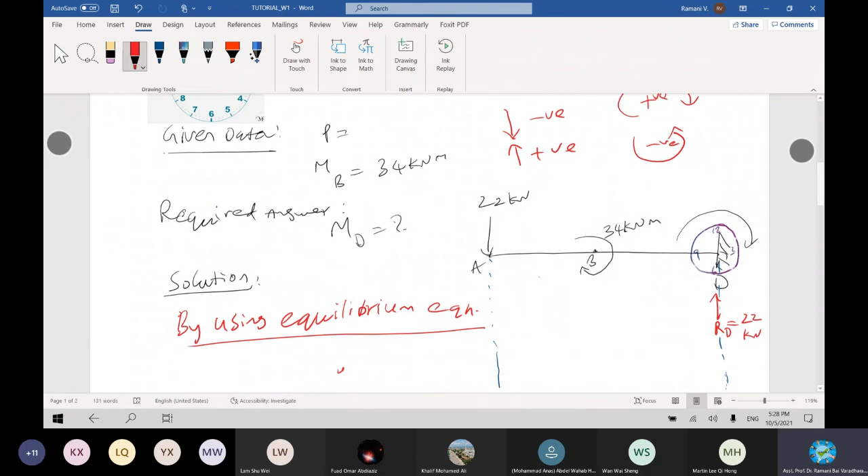Clear? Now coming to this case, what we did: the moment, I put it roughly, the reaction moment may be in the opposite direction, so I put it in a clockwise direction, but ended up with negative, meaning what? Anti-clockwise. Doesn't matter, if you want you can just write it down as anti-clockwise this way.

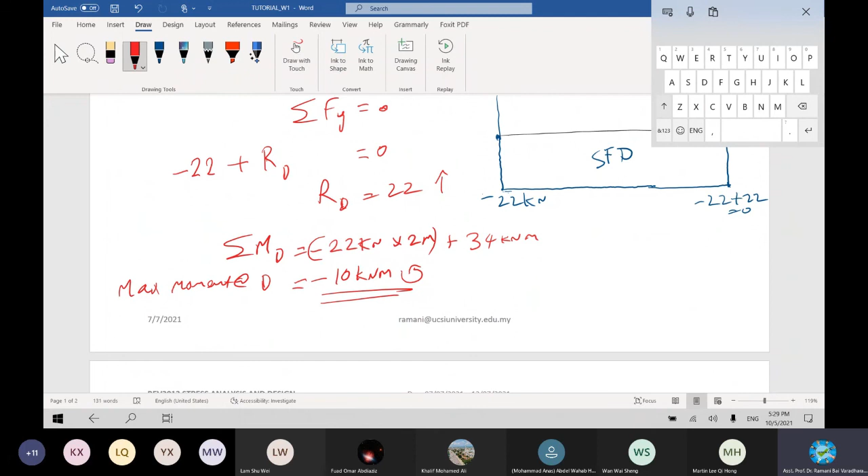Negative. We found the maximum moment at D. You can try the answer like this. Any other question? You have to draw the diagram.

Draw the diagram, one moment. Let me start here, use the black color. Axis, axis I use.

Miss, I have to leave now. Okay, yeah, you can leave. I'm going to finish in a while, 1 minute only.

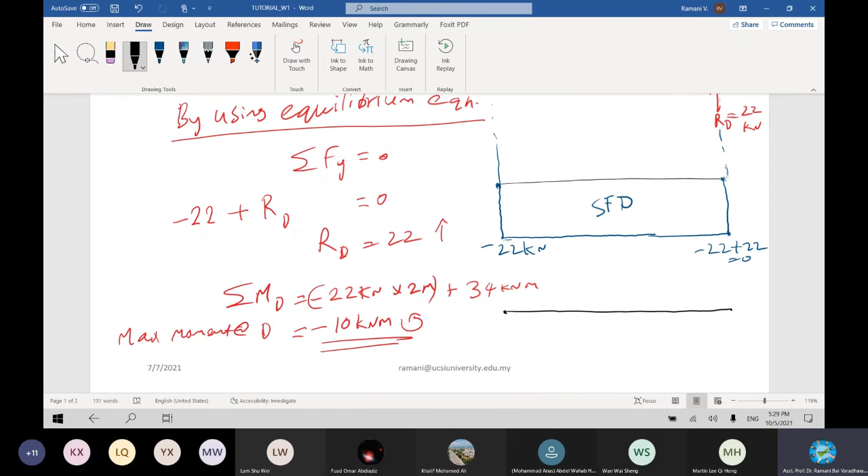Let's plot the bending moment diagram. Start from here, it's a free end, right? It will tend to move. There is no reactive moment offered by the member, it can freely move, so moment will be 0. In other words, where there is maximum shear, moment will be 0.